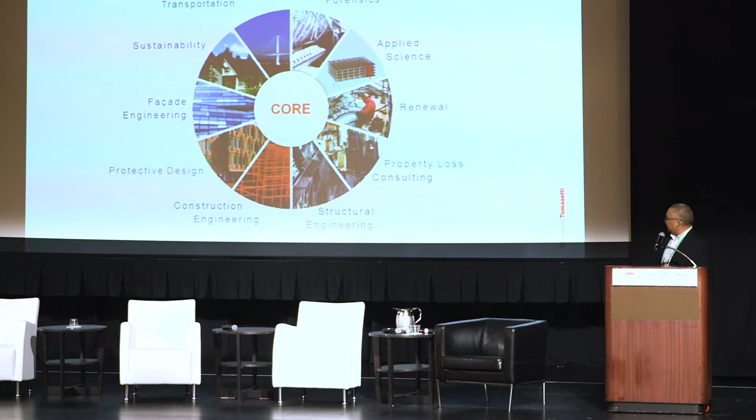Chief Technology Officer at Thornton Tomasetti, and we do a lot of projects across the world, large scale to very small scale, and very complex projects.

We've been BIM adopters 100% since 2008. We were one of the first firms to dive into the BIM world because we saw the value and the potential value of BIM. But I'm going to talk about how some of the obstacles in how we work and legal issues are keeping us from seeing that value downstream.

As I mentioned, very large firm, 1,500 people, many offices across the world. We do a lot of things, so it's not just structural engineering. We do engineering across a wide gamut of fields, as well as we have a few very talented scientists in the firm as well.

So we have structured our design initiative to be the global leader of change and innovation in the industry. And with that, we've created this initiative called CORE.

CORE is an incubator within the firm that has also spun out some startups in our twin entity. I'll talk a little bit about that. We have three different vectors to the core entity, and that is the core studio, which is the everyday, which is people 100% of the time working on tools and research projects as well as very complex projects.

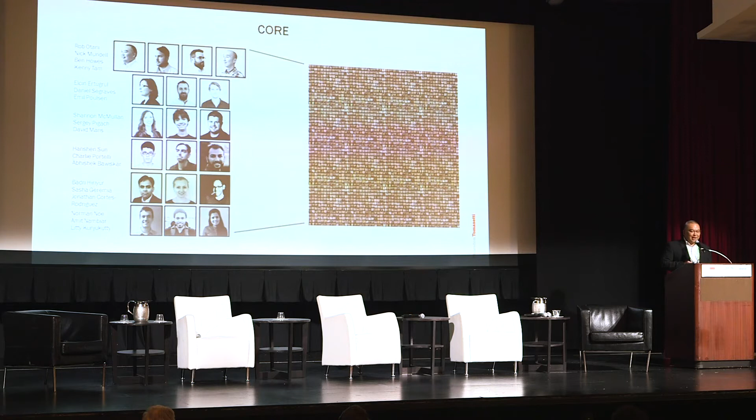And this is our team that I mentioned that is working on this all the time. We're almost 20 people. We'll be 20 people next month. 14 of which are software developers who just happen to learn software development and also be architects or engineers. Most of these folks are architects, actually.

So the Twin Accelerator, I'll go through this very quickly. It's valuable to understand that some of the IP that has been generated in Thornton Tomasetti has probably more value outside of the firm and can touch more markets than just the engineering field.

So these are the four entities. OnScale is a multi-physics solver, just got Series A funding. Konstru is an interoperability platform, fully data-centric, which I'll talk about a little bit today. Hummingbird is a tall building damper that was co-developed with NASA.

It's basically half the size of traditional dampers and significantly less cost, and you're going to see a lot of those on tall buildings in the future. As well, Pumpkin Mounts is more of a defense industry item that protects equipment from shock and vibrations.

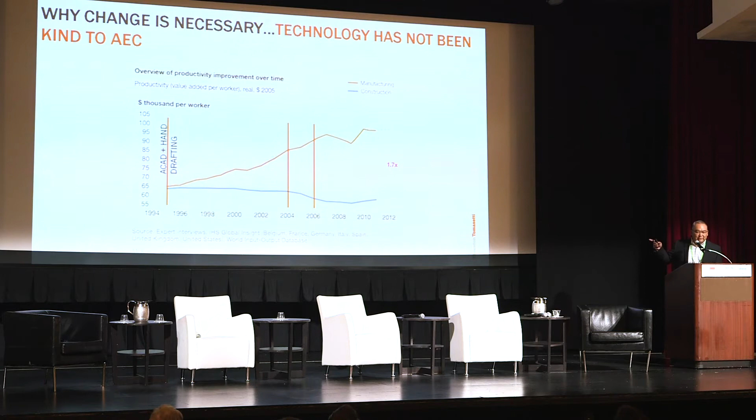So I would argue that our industry has already been disrupted, and this is pretty evident in this McKinsey graph here. This is when I started engineering, or structural engineering at least, in 1995. We were about, I'm going to say, 100 people in New York.

And we had probably 3 computers for the engineers to work on. So it was very much a manual way of working. We did sort of half hand drafting and half AutoCAD for plans.

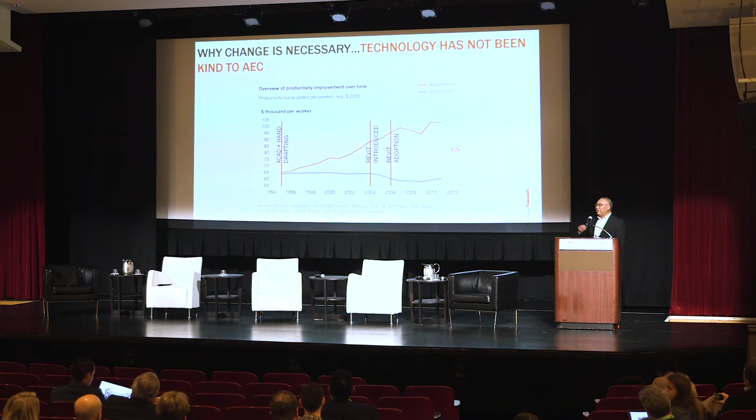But you can see the productivity in the construction industry, of which we are part, has not fared so well with the advent of technology. Revit was introduced in 2004, and Revit adoption started in 2006, and you can see the trend is that the power of BIM has just not been realized by our industry.

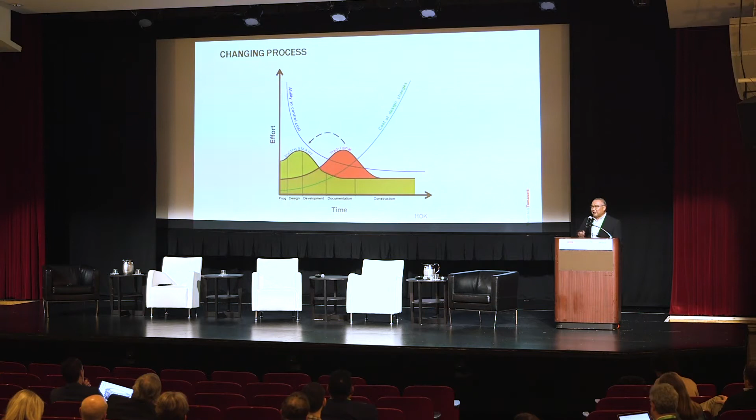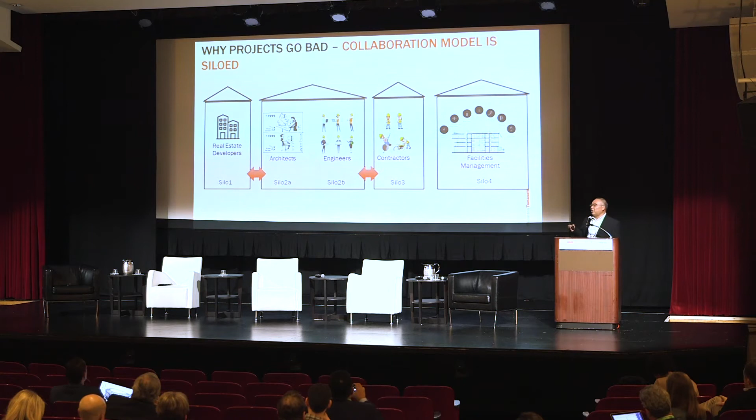One of the reasons is that the model of how we work is still very old school. This is the typical siloed view of how we work. It starts with a developer, an owner who wants to build a building, who hires an architect, usually the first entity they hire. Then the architect is responsible for hiring the engineers, and it's a very linear way of working and transferring information.

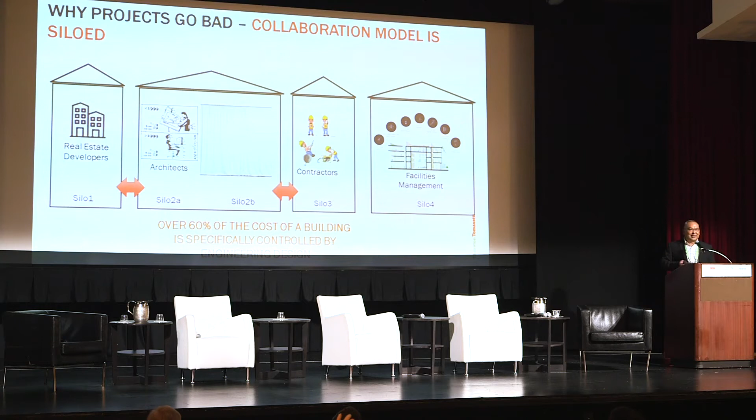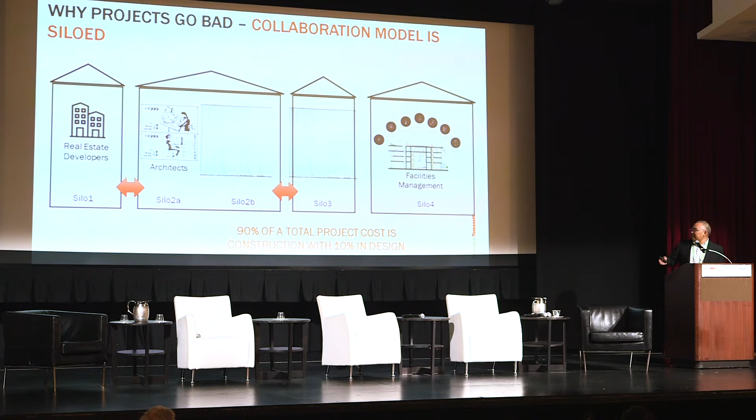But to this day, some concept level designs have no involvement with the engineering team. You can see over 60% of the cost of a building is typically directly related to engineering. So if you don't have the experts at the table at the right time, you're already potentially going down the wrong path. Contractors, even worse - many times they don't see the project until it's time to bid it. And guess what? At least 90% of the cost of a project is in the construction world. They should have a seat at the table early on in the process.

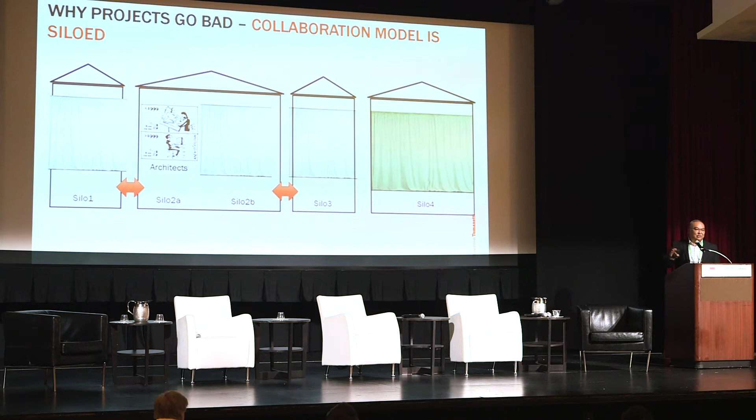In facilities management, I would say institutional projects is where we've ever had any idea of what the FM folks want in their project and need to maintain their building efficiently. So this is where we are, and it's not a good model. This is the model that is being disrupted by the Katerra's and the WeWorks of the world by stringing these ideas together. By not having all the right players at the decision-making period, the owner has the curtain drawn over their eyes, and they're stuck with potentially cost overruns when they're not anticipating that.

So this needs to be the model - a general idea that everyone who has a stake in the game, who can make an impact, needs to be at the table at the right time. I'm not saying the architect doesn't lead design, they always should lead the design, but the other experts in the field who have an impact on the built project need to be there and making decisions.

So, the promise of BIM. I would say part of the problem is that the standard of care, which was developed back in the 30s - I've worked on Rockefeller Center buildings, and the projects are basically literally drawn on canvas. The only difference is that the canvas you can't throw away very easily, right? Paper you can. So this is where we are.

We have the power, we have the Ferrari here. Everything in that model, the BIM model - this is our Mirar platform, a 3D BIM viewer platform that we created - we can see all of that. We can see the geometry, the material properties, all the data attributes in that model, yet we're still required to give it on a 2D drawing, flatten it down into a dumb piece of paper. So the standard of care, developed in the 30s, i.e. the horse and buggy, is still the standard of care today. It doesn't make any sense at all.

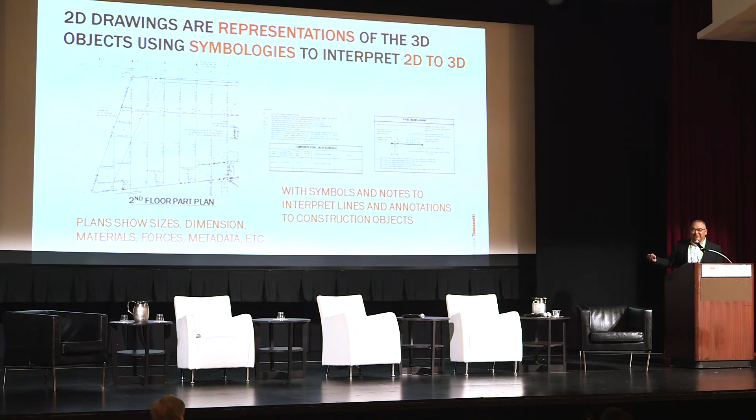But let's talk about that. So what does a plan actually do? It represents sizes, dimensions, materials, forces, other metadata, strictly by symbology - symbols, designations that represent this in the 3D world. But guess what? We already have that, it's already in the model. We're taking a really complex thing and making it really dumb, and the dumb thing is what goes to the contractor, which is unfortunate.

So again, this is the Revit platform. I click on that element. I have all that metadata, that really smart data that I'm also showing in representational form in 2D documentation. That doesn't make any sense to me. There are some things that are okay in 2D, but for this type of information, it doesn't make any sense.

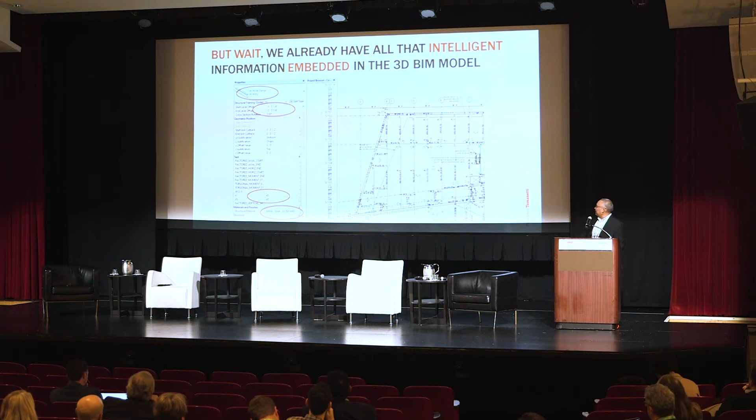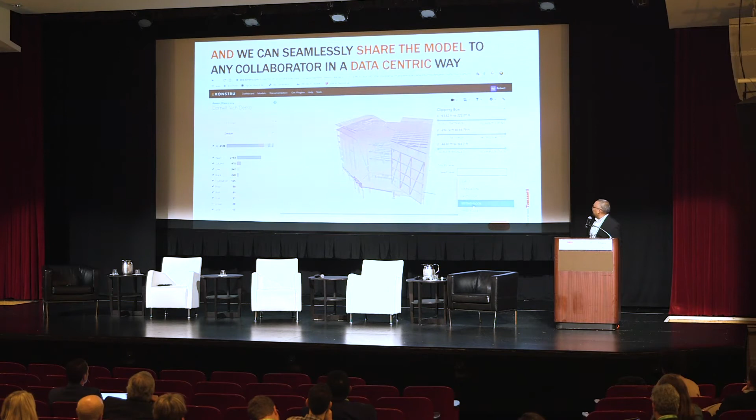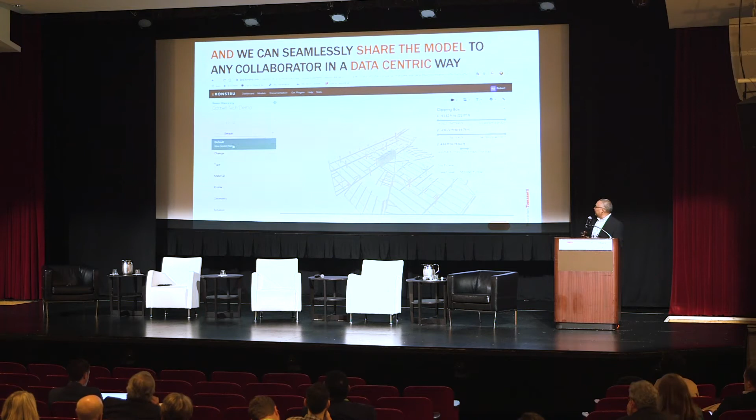So this is our Konstru platform, the Konstru platform I mentioned. This is a database sort of environment. This just demonstrates this building in 3D showing that same element. So this is uploaded from Revit. We have a nice little viewer. I can hone in onto the second floor, which is where that plan was taken. Spin it around. Also, you get the other advantage of 3D, which is you get the spatial recognition of the adjacencies of this element and the complexity of the building and all of those things.

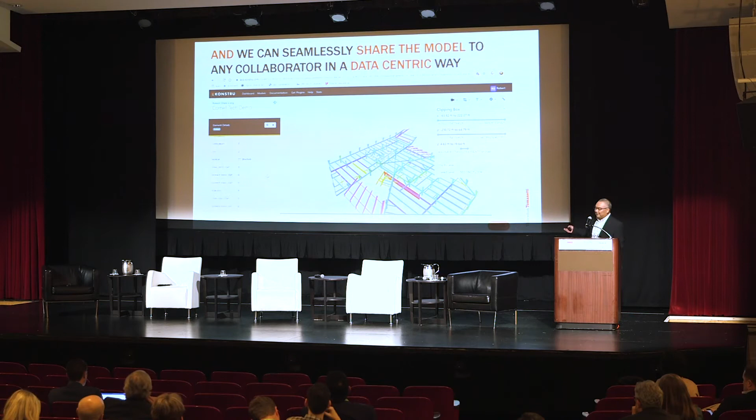And guess what? All that data-rich information is all embedded in the model that we can access. So again, why the 2D? It doesn't make any sense.

So for building departments, obviously they still need drawings of some documentation, but we talked to some, like the Commissioner of Department of Buildings in New York City last year, and he told us the only thing that we look at is fire egress. And I was like, why am I going crazy issuing all these drawings, spending hours and hours at a time, creating a 2D set that they're just going to throw in a bin somewhere? So I would argue that as an industry, we need to create a value proposition for

jurisdictional building departments, building code officials, that we're going to issue a digital twin at some point. Now, they're going to get significant value from that. Imagine the building department not only has some representational 2D drawings, but they have a 3D model, fully data-rich, that they can actually use for their everyday operations in the city, as a smart city.

Again, they're interested in the egress diagrams. Fine, we'll give them that. We have all of that. Safety diagrams. We have all the fire access. We have all the infrastructure, all the piping, all the things that they need as a city, as a jurisdiction to manage their city. We can give them that. And so it's not just to say, okay, let's just issue 3D drawings to a contractor. We also have to give a value proposition to the jurisdictions.

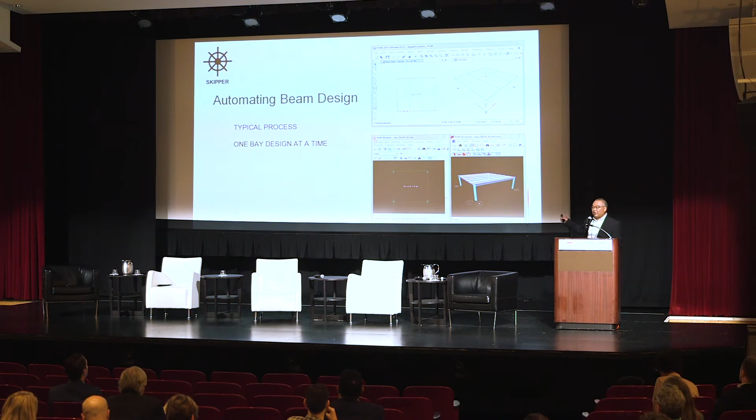We recreated this platform as a web-based platform. Anybody can use it, I could use it on my phone right now. I can do any number of designs, fully designed including vibrations, in seconds. So I could do it at a meeting, or while I'm taking the train. It's opened up significant value, and we actually have other engineers, like Katerra, testing this out, so they see the value in it as well.

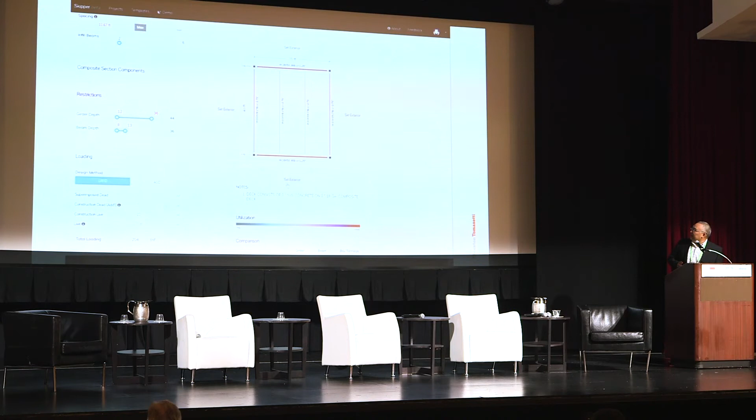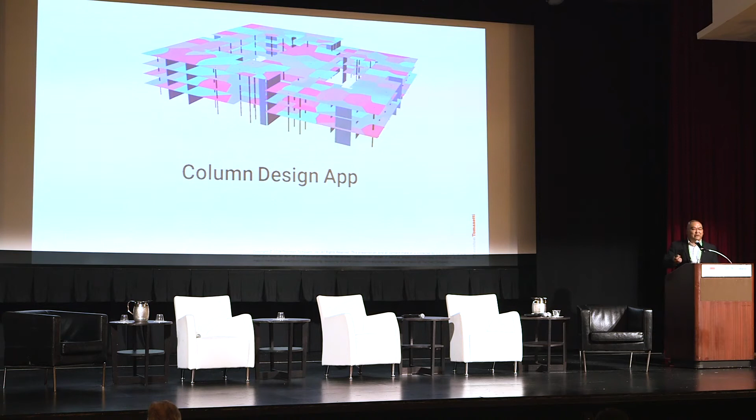Column design app, a ubiquitous column design app. Something that I used to sit there with tracing paper on the table, manually tracing out all the contributory areas of floor relative to columns. But because of BIM, it's made it harder - we not only have to do that, but we have to get that into our BIM models in a very smart way.

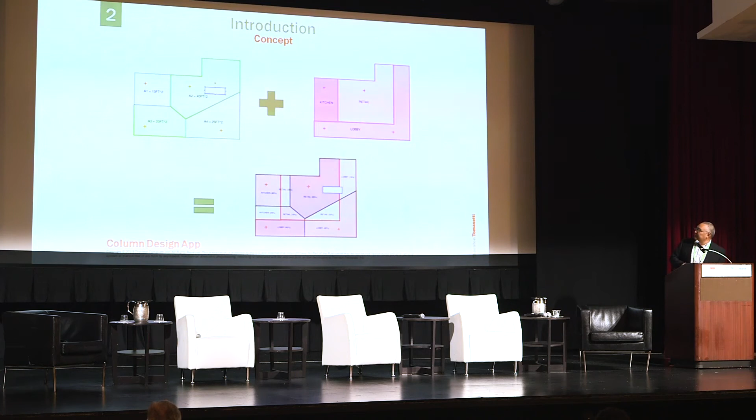So we've closed this loop of getting from our 3D model to our design spreadsheets and back to our 3D model. It does these area takeoffs, but it also includes overlays of programming, load programming, which actually is not necessarily consistent with the area of the trib. So this is a quick video, I'll talk through it as it goes along. By the way, this was also a research project at our office that has now become an everyday tool.

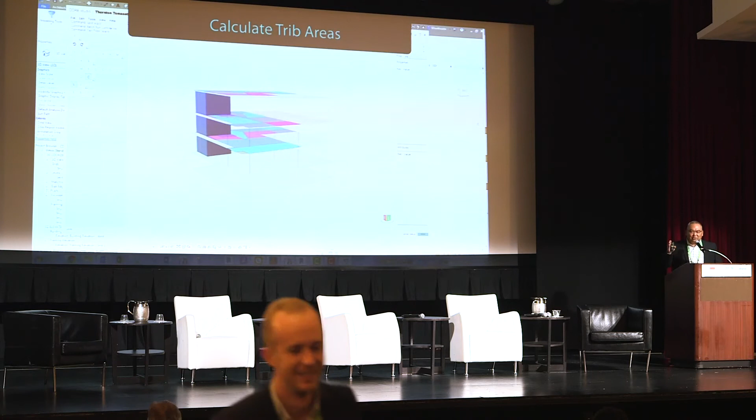So we start out in the Revit platform. Usually at SD, we have some sort of bones of a Revit file. We export it into a desktop platform that we do a lot of repairs. So we flatten and simplify the three-dimensional geometry into a virtual building representation of that BIM model.

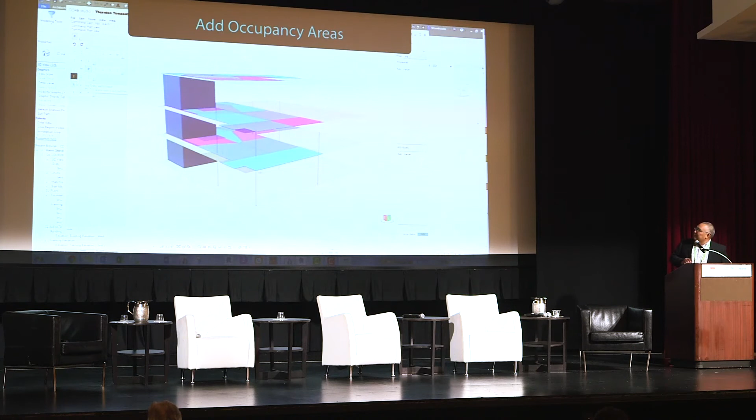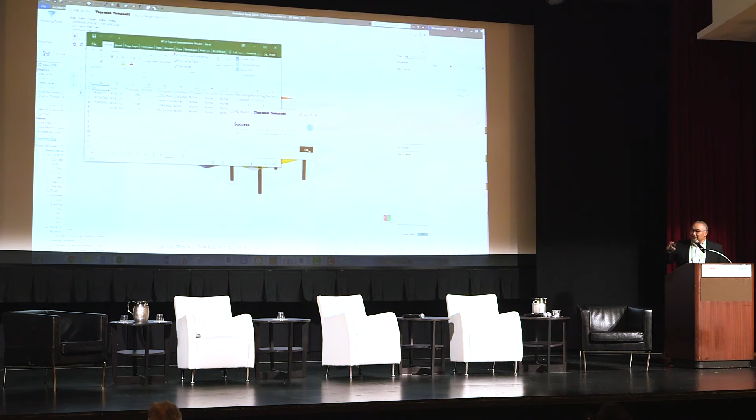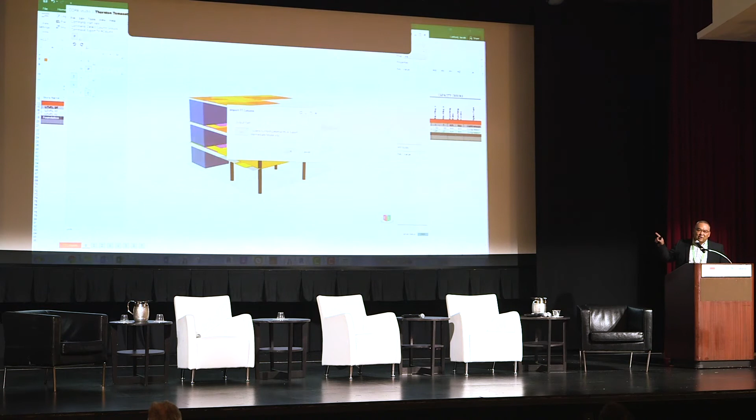We apply the occupancy areas, like hallways and retail areas, and whatever the different loading conditions are. It dices and slices that floor loading really quickly, puts it into our very robust TT column spreadsheet, brings it back to the platform. Now we can view the results in the three-dimensional platform, confirm that it's okay, and then we push it back to Revit.

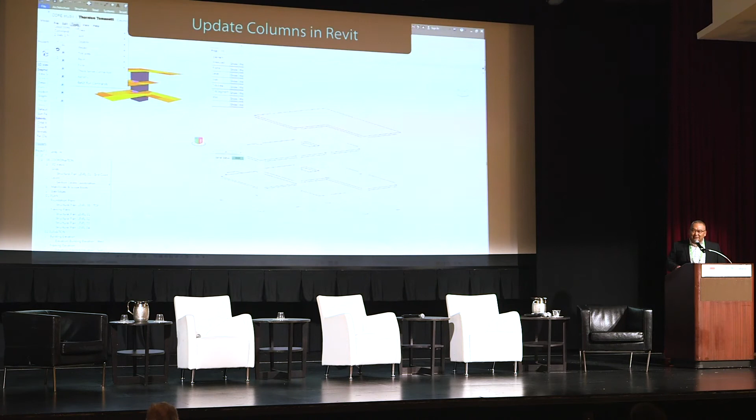So no manual markups, no manual takeoffs, no manual drafting, fully automated workflow, and no mistakes.

Swarm is a new app that we are going to release at our conference in October, the AEC Tech Conference. This is something that, if anyone's familiar with Rhino Grasshopper - Rhino is a three-dimensional modeling platform, Grasshopper is a visual scripting platform that allows parametric design, very powerful design.

The unfortunate thing is it's kind of why some people are software developers and some people are not. The people who are software developers get that very clear nerdy logic, right? Others don't want to spend the time learning all the languages and things. Grasshopper is very similar. No matter how much training we do, probably only about 5% of the engineers latch on to this concept of parametric design and big design space.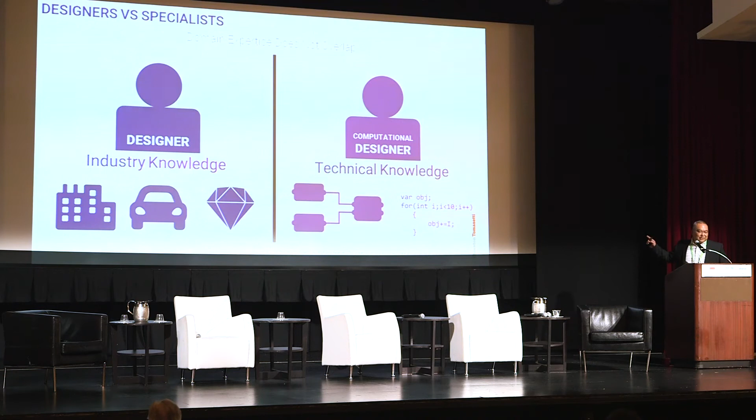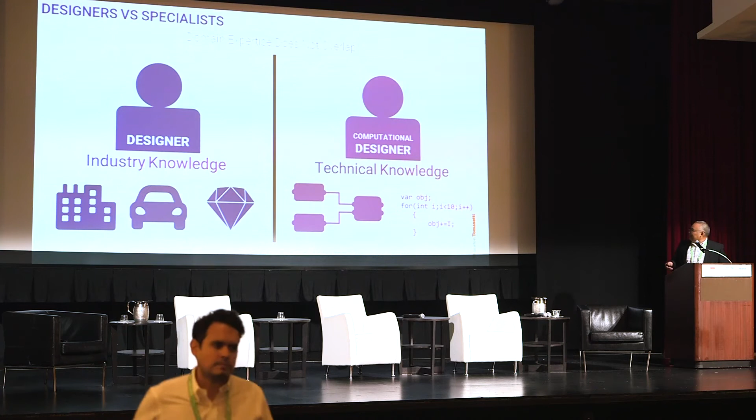So the idea of this is to put that power of parametric and computational design into the everyday user - the industry knowledge person, kind of like someone like myself who has 20 plus years experience, doesn't necessarily have the time to learn Grasshopper or become an expert, but we do have those folks. Every office has those folks. So the idea is to get that power into the hands of that designer.

So that user also doesn't want to change platforms. They're usually in Revit and want to stay in Revit, or they're in Rhino and want to stay in Rhino. They don't want to use Grasshopper and all these other things to get all the geometries out and do the interoperability. They want something that's a click of a button.

The author struggles to get their designs and their computations to the user, particularly in a large office like ours. So the idea is that we give the developer or the author a platform to share that knowledge across all of these different users.

And by the way, because all the design computation is happening in the cloud, this can not only work for the Rhino platform, but can work for pretty much any of these other platforms - Illustrator, SketchUp, Revit, SolidWorks, Fusion, whatever. We're going to start with Rhino and Revit as our first, probably go to Illustrator next.

So this is just an idea of how it works. Again, this is three-dimensional manipulation being done in the cloud, presented to the user who has no experience using these tools. In this case, we're going to do a structural wireframe generation developed by a script.

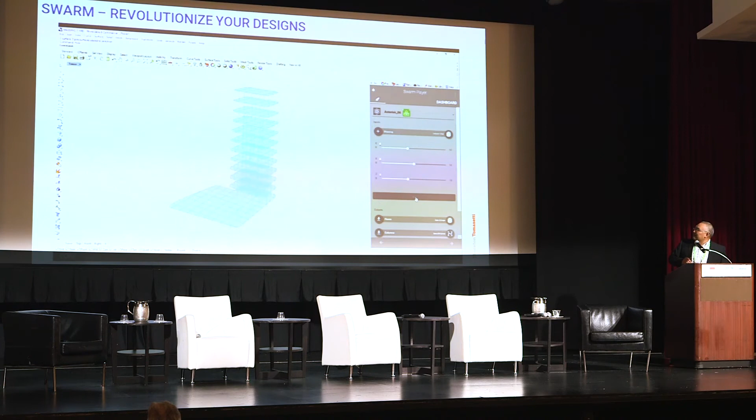So purely from a massing, all someone has to do is pick those massings underneath that draped facade, move the sliders around to the geometric configuration they're looking for, push the button, and the result comes out. Change the parameters, regen, and recompute.

So again, this person using this has no experience in any of these computational design workflows, but they now have access to that power. This is just a further case where now we're going to do a facade geometric analysis, or generation, I should call it.

So the idea is to put the power of the expert user into the everyday user.

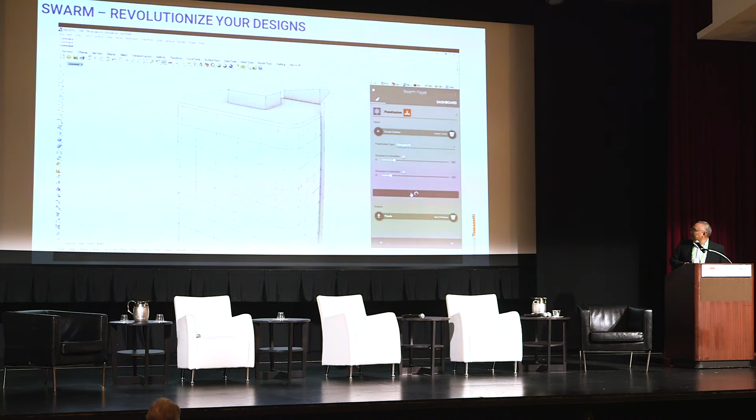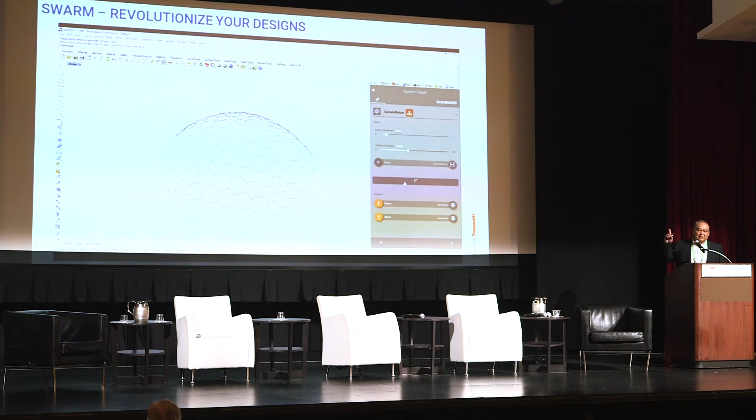So what's under the hood here is Rhino put something out called Rhino Compute, which is basically a Rhino service occurring in the cloud. So we're actually calling these cloud servers, running the analysis up there, so they don't need to have any of the hardware installed. They don't need the program. All they need is a web browser, basically.

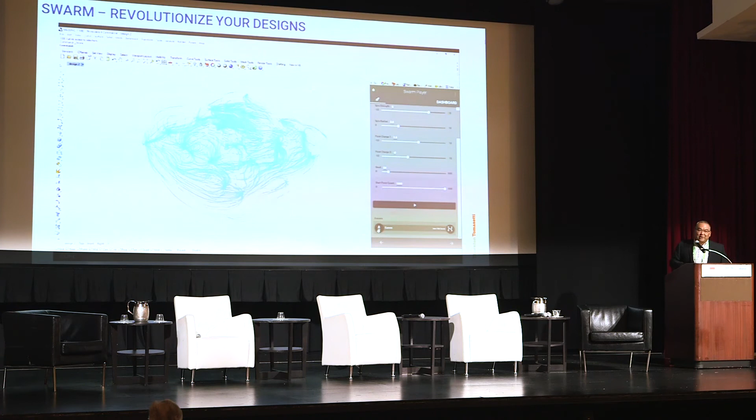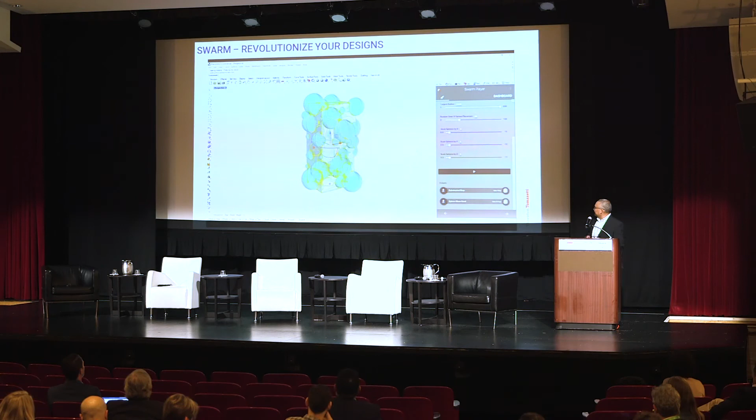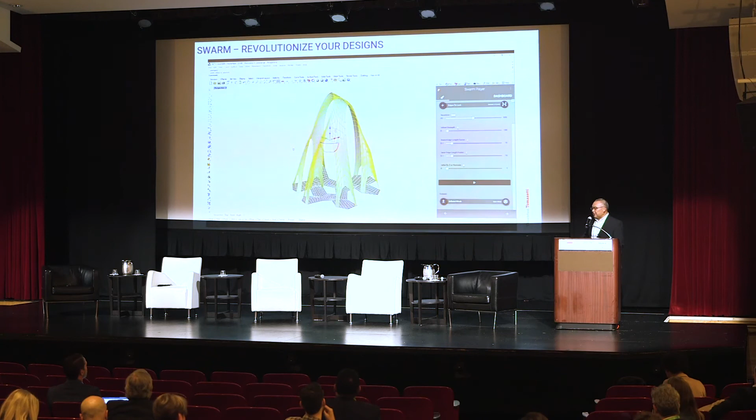Some of these get a little funky, but you get the idea. And by the way, this stretches across multiple markets. Rhino is probably the #1 program used in sneaker design, boat design, jewelry design, as well as architectural design. So it's a huge design space, and this is something that could open up that power.

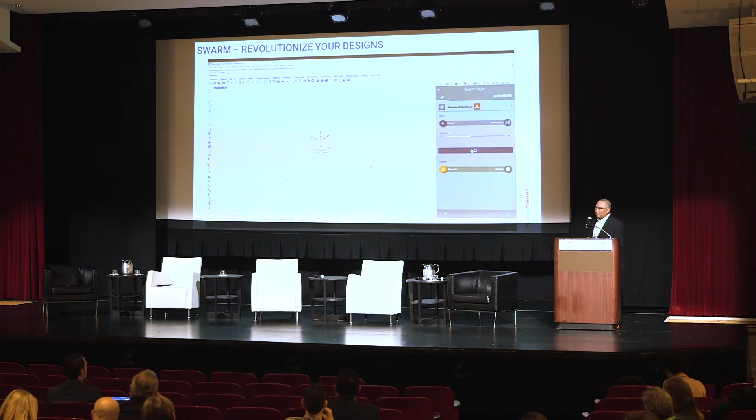So I want to talk a little bit about AI. I mentioned before how we see that we've developed those tools with the intelligence of the firm. Now the other thing we're actually looking into is how do we take the intelligence of the firm and put it into an app, basically an artificial intelligence app.

I'm going to talk about Asterisk, which we started in a way in 2015. I learned about machine learning back then and saw the power of what it potentially could do. So we built this application that, just from a massing, just from an envelope of a building, can generate a full structural design at concept level in under a minute. Something that a team of engineers would take 2 to 3 weeks to do, I can do one iteration in under a minute, with the embedded intelligence of engineers built into the app.

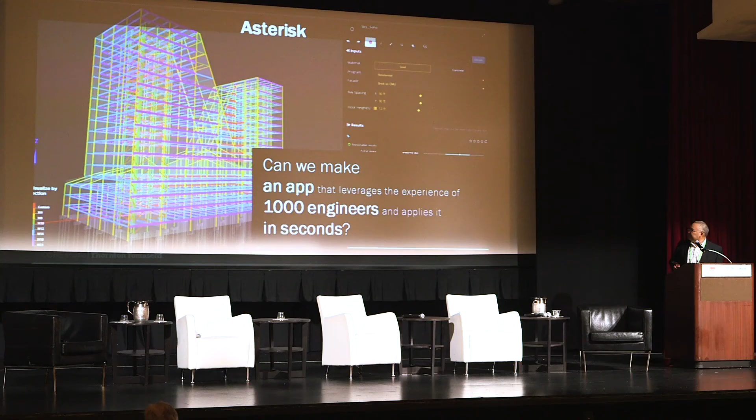We released this internally last year, and we've opened it up to some collaborators. The second highest user of the app is an architect from KPF. He keeps saying he's only playing with it, but he's used it, I don't know, 300 times, so that's quite a bit. We may send him a bill pretty soon.

Right now it's calculating for a steel building. We're changing some of the geometric parameters, floor to floor heights, changing to concrete, and it's recalculating beams, columns, slabs, floors, core walls, core bracing, and foundations, all in under a minute. Everything's cloud-based here, we're storing all the results in the cloud, with a robust data visualization so we know it's doing the right thing. Then we have a way of comparing all those options so a designer can pick and choose what metrics they're looking for from an optimization standpoint.

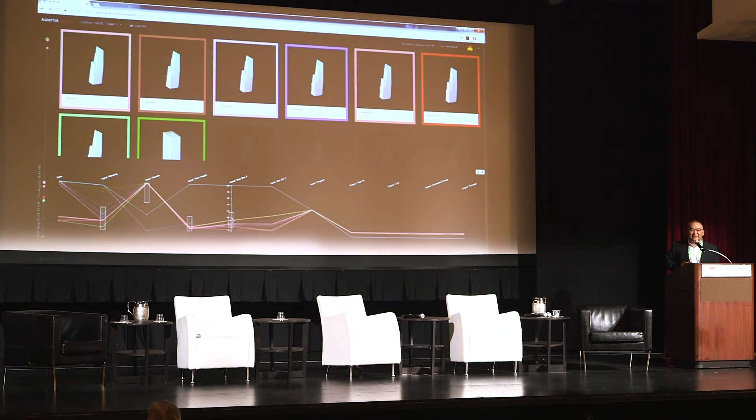So we showed this to architects, and it's funny because most of them don't know what to do with it. It's beyond the realm of what's normal. So some of this artificial intelligence is going to be about training people how to leverage real significant computation.

So I'm going to talk about delivery. Delivery, I think I mentioned, doesn't make sense right now in most cases, but there are some really good examples where it has made sense and made huge dividends.

In 2016 we did this project with Shop Architects in Miami, which is still there, in the Jungle Plaza district. It was only supposed to be there for 6 months, it's now been 3 years and still standing. It's made of plastic, Branch Technology, a startup 3D printing and additive manufacturing firm, was the fabricator. We had 3 weeks to design this thing, and that in itself was innovative, but what was really the real demonstration here is that we never issued any drawings. We had a full-scale, fully customized pavilion that was installed by a bunch of architects with zip ties, literally, in under 2 days. There's actually 2 of them. This was the first project we worked with them on, and it showed the power of 3D printing technology, but also the digital workflow of communicating in a single platform.

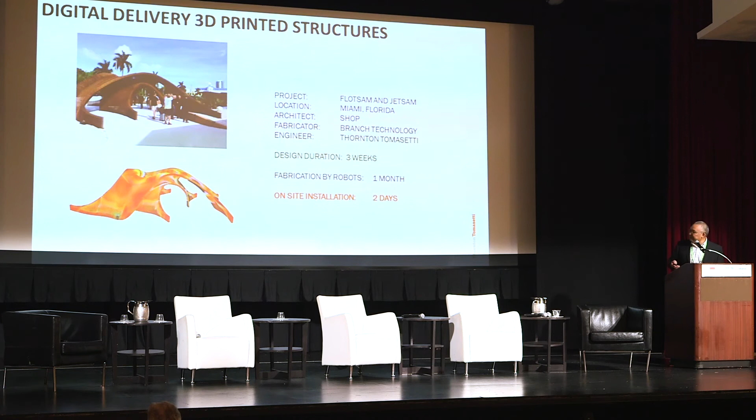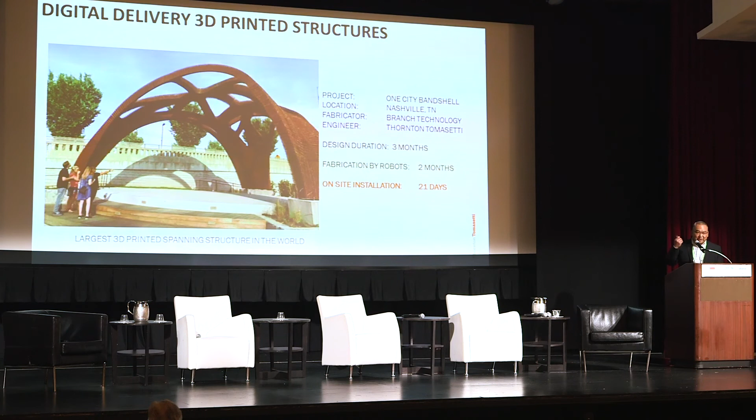The second one is the largest 3D printed spanning structure in the world, called One City, in Nashville, Tennessee. This one's obviously a lot bigger, a lot more parts, a lot more computation involved, but again, a full-scale project. If this thing falls down, it won't hurt anybody, it's so light. The particles that actually create the ABS material are very weak, actually, you can break it with a finger, literally. So that's why the engineering part was significant in this. This is a quick video of the process, which we submitted as a paper at the International Association of Shell and Spatial Structures Congress a couple years ago.

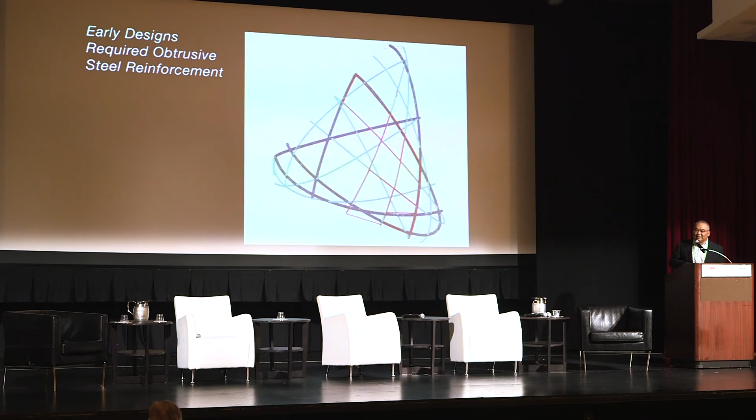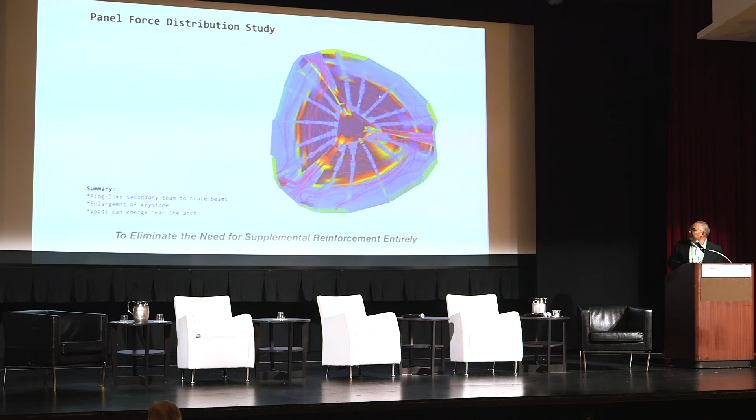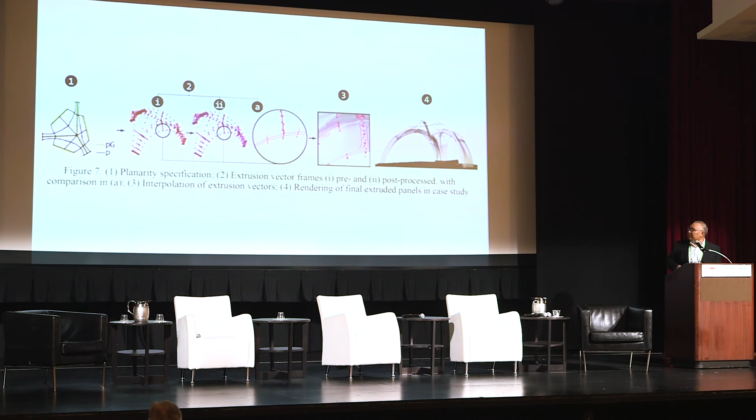So we started out with a very generic pavilion style, went through significant engineering iterations using Grasshopper, both topology optimization and form finding, variations of the above, to come to a design. And you cannot do this without computation, I can tell you that. Trying to do this by hand, forget it, it's not done.

This is a permanent structure, so it had to resist ice, wind, and snow. Similarly, we didn't issue any 2D drawings for this, all 3-dimensional issuance, and the client was super happy. It's not that you're going to have these every day, but it demonstrates how powerful it is if we have a correct platform for design, delivery, fabrication, and construction, that you can actually do things way beyond the norm of traditional construction. The people who worked in the factory put this together, no special training, everything fit together like a glove. Huge success there.

I'm going to talk about advanced project delivery. I'll show some large-scale projects where we've seen the methodology of how we deliver and communicate the design all the way through fabrication and construction have significant gains, again without the issuance of 2D drawings. So we've coined the term advanced project delivery.

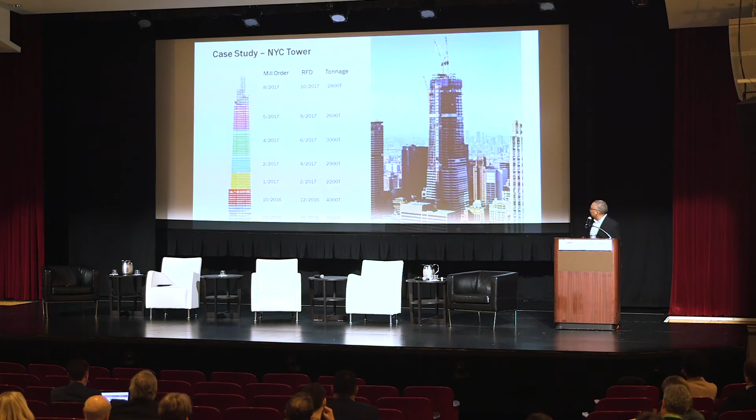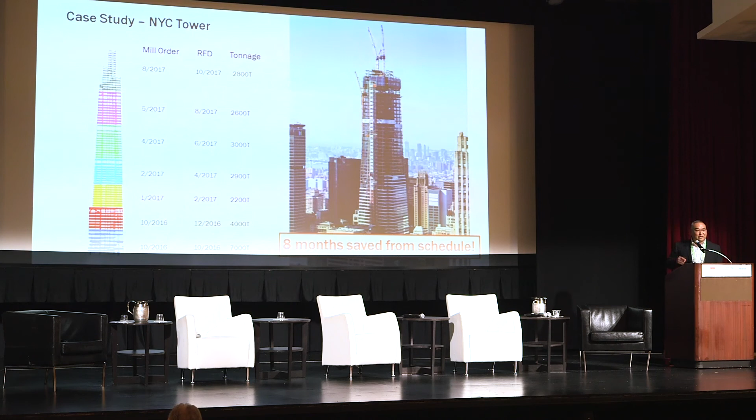So this is an example project in New York City, 1.75 million square feet, where we did this with the advanced project delivery methodology. And this is coming from the owner, not from us: 8 months saved from the overall schedule. Now, 1.75 million square feet of leasing is a lot of money, so the value proposition is a no-brainer. In a way I wish our fee was leveraged against that, but that client will not go any other way now. It took a really smart client to do this, but we see this as the future of how we do work.